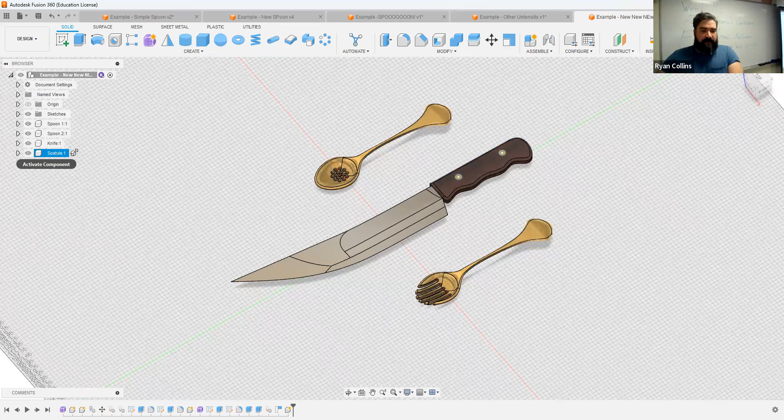So let me hop back over to Fusion. So we've got our sporks and spoons and giant kitchen sword. Let me start another one. I'll create a new component, and this one will be spatula. I'm going to activate that one, and let's go ahead and hide all the others so we're not confusing anything.

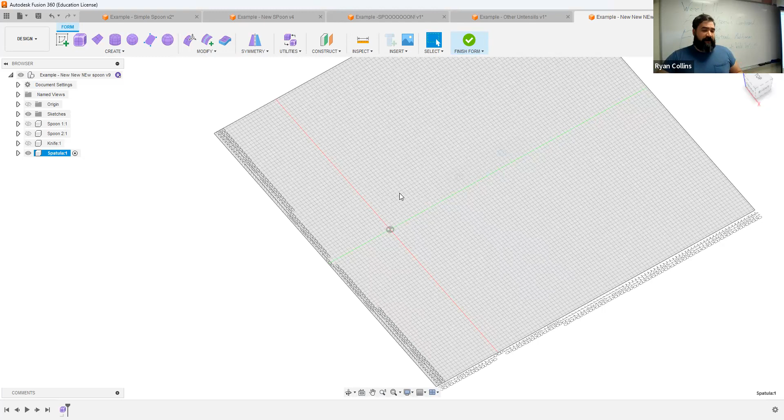So I'm going to start standard again, move into the create form workspace. There we are. Now I'm going to create the spatula by working with a plane and then manipulating probably a couple of planes. So in this case, start with a plane, same deal.

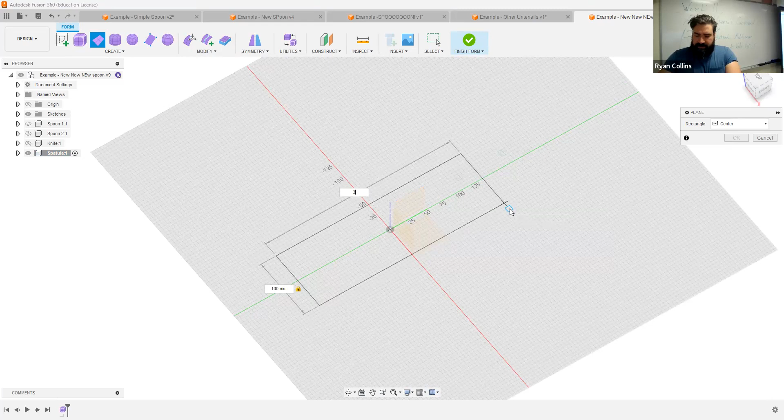There we go, I'm going to use it as a center rectangle. And whether or not we start with the handle or the blade doesn't matter. So let's go ahead and stretch that out. What should that be? Probably like maybe 100 millimeters wide. We can always stretch this more. And sure, let's say 300 long as kind of a longer handled thing.

There we go, hit enter. That locks it in place. That's a plane.

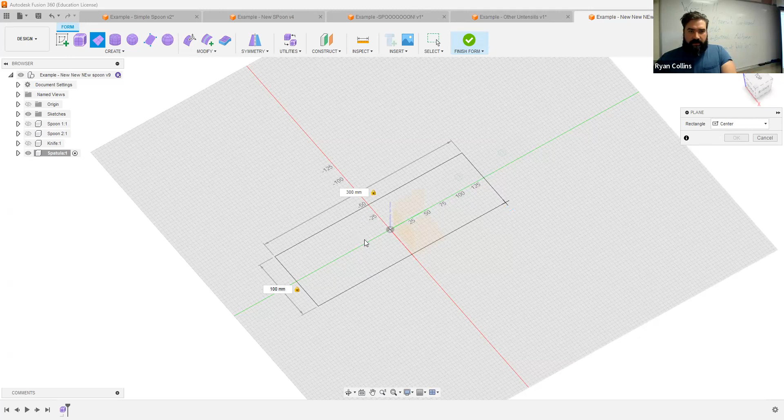Why is it? There we go, don't know what happened there. Clicked on it. Okay, so I made this wider like that. Maybe I shouldn't have, we'll see.

I'm still going to use just a pair of faces lengthwise, so I'm going to add symmetry along the length. There we go. But I think now maybe I should shrink this and then widen it after the fact. So let's add a couple of faces. Sure, again 4, that works, something pretty basic, hit OK.

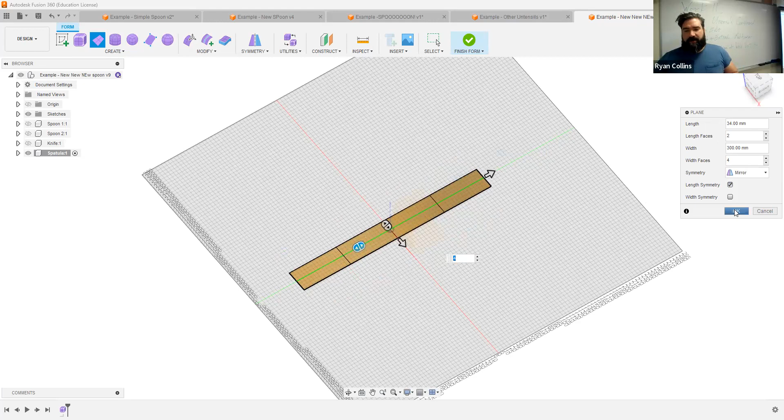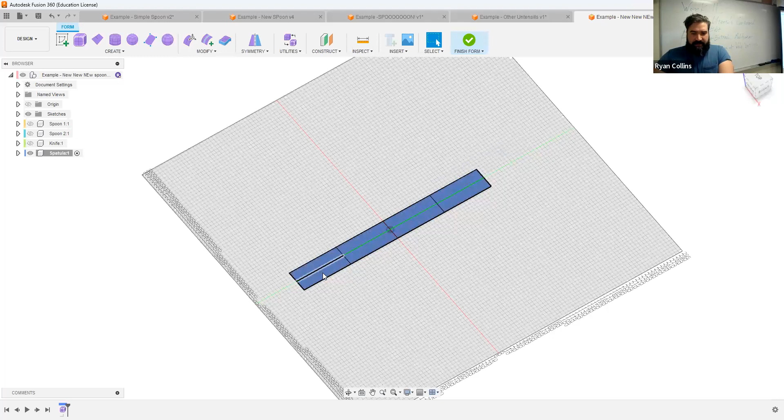Now what I want to do here, and I realize it's still colored, so let's switch to auto color, Shift N. There we go, different color, you can see the symmetry line a little bit more effectively. So what I'm going to do I think first is make this first segment the spatula, the scraper. So let's go ahead and edit form, standard stuff, movements, and all that.

I'm going to grab just this vertex and just drag this outward. Now you can see that's making much more of a sharp line, or sorry, a curved line rather.

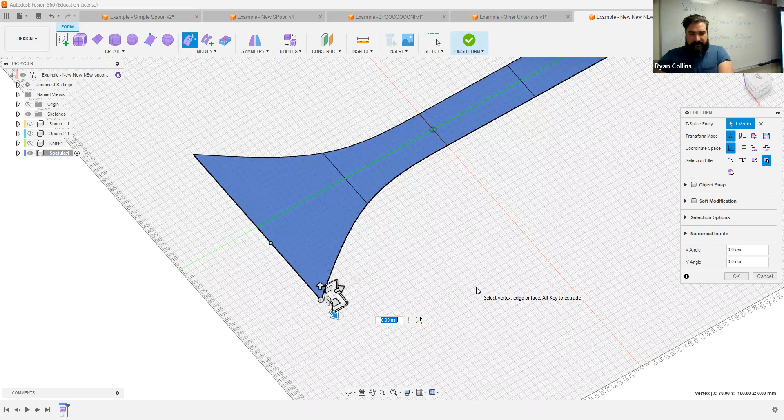That's okay. Or if I want to keep that a little bit straighter, what I could do instead, let's Control Z that. And instead of grabbing the vertex, let's grab this face, and I will rotate that face. Just a different way of working.

So see how now it's much more of a wider form there. Now I don't know how well that's going to work, that looks kind of a little wonky. Maybe now I should bring it back to straight, and there you go. Now that's still wide, or rather that's still curved. If you want that to be straight, that's okay too.

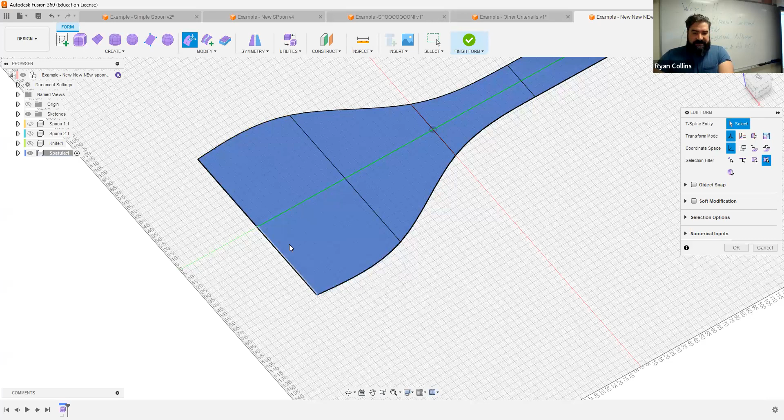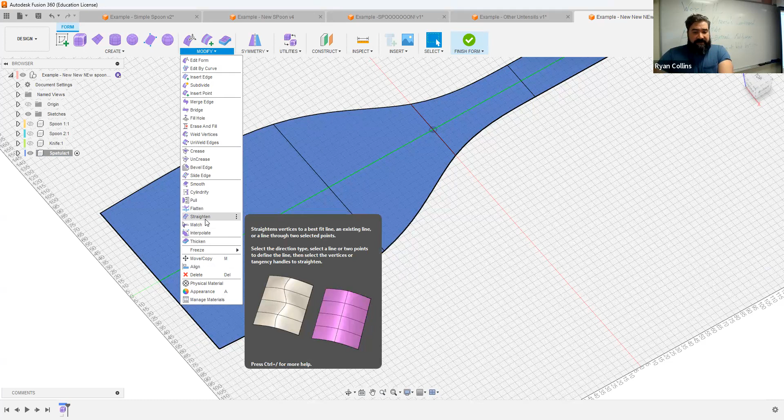Let's grab this side here. I'm just going to drag this down a little bit because I want that a little bit more of a longer workspace. So if you decide, you know what, I actually wanted that straight, what you could do is go to modify. Let me finish edit form, go to modify and straighten.

So this just straightens existing edges as best they can. So you can see where this is referencing a 90-degree corner. I want to straighten this T-spline. Now what it is, you have to select between 2 points, so I can't select this middle one, I want this one and this one.

And then control points, surface points, whatever. Let's see if it's going to work for me. Fit, select line, there we go. Let's see if it's letting me do it.

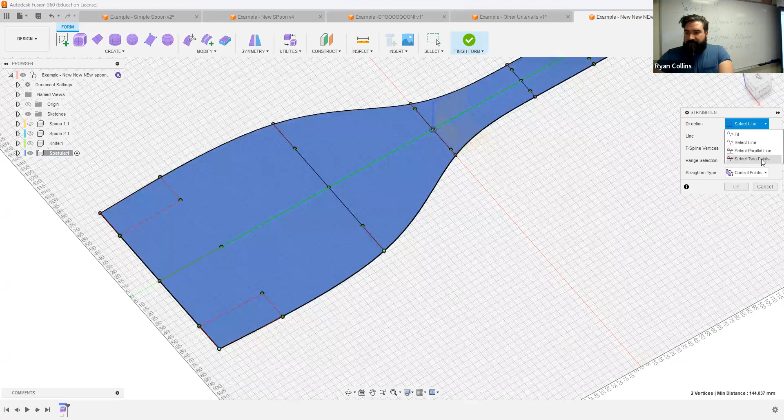Nope, fine, select 2 points. There we go, you see my reference line. It's hard to see, there's this yellow line that's appearing. It's a little bit difficult to see sometimes. Come on, let me. There we go.

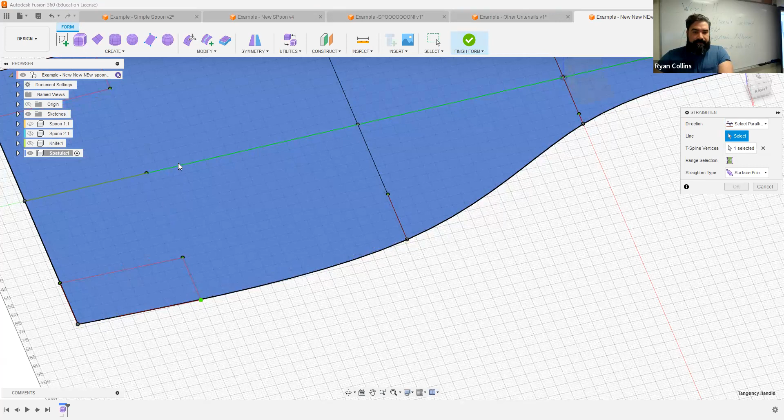So that part's straightened, but this is not. Come on. Sometimes these don't work as well as you would like it to. There we go, now I got my reference line. Let's drag this around, come on. Sure, let's select it along by a parallel line, if it'll let me do that. Come on.

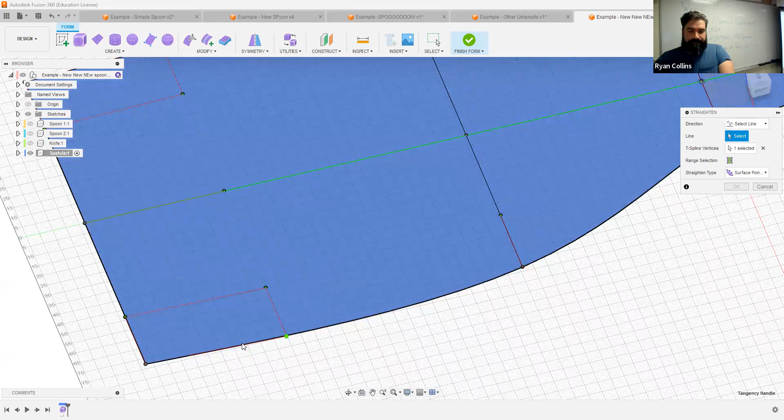Not letting me select my center lines here. All right, fine, abandon option. So it's not letting me work how I want to. That's okay, we can always trim this in a more straightforward way.

Now, what I do want is I want this to have much more of that up and down angle. So what I mean by that is I want this to not be flat. I do want this to curve upward.

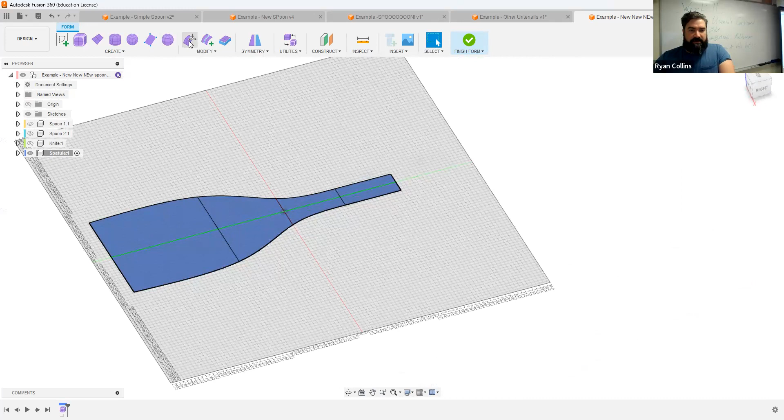So select, let's go back to edit form, and I want to select, let's just do it by vertice. You know what? No, I want to select by faces. This might be a little bit easier to work with.

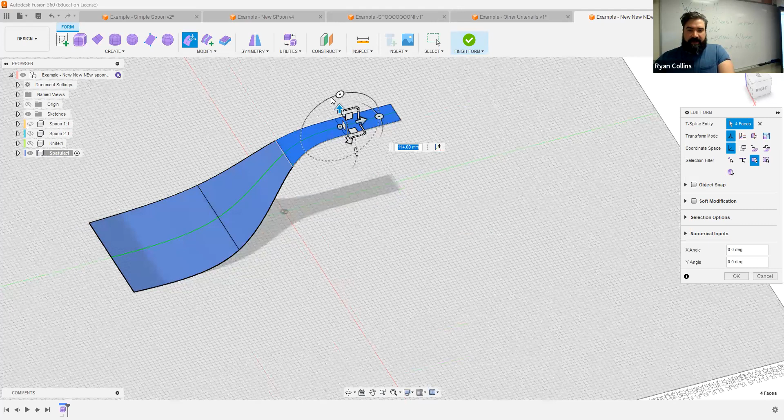So what I'm going to do is select all of those, and I'm going to drag that up, but I also want to rotate that. Oops, accidentally.

There we go, see how I'm getting my curvature here? But this part here is not quite cooperating how I want. So maybe what I want is my handle more like this, but I kind of want these angles, I don't want this to be quite of a sweep. I want this more to be straight.

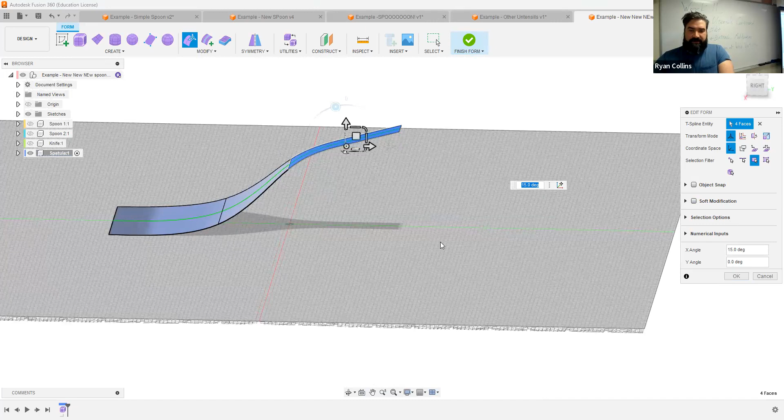Perfect. So I'll say, all right, I like where that is, hit OK. And then we'll go to modify and crease. All this does is sharpen those bends. I accidentally had that selected, so it automatically did that.

Great, okay, repeat crease. I'm going to select this line, and now I have much more of a sharp angle there. So you can very much think of this, not always a perfect analogy, but crease works exactly like it sounds. You're putting a crease in a piece of paper, a fold. It's a sharp line. Hit OK.

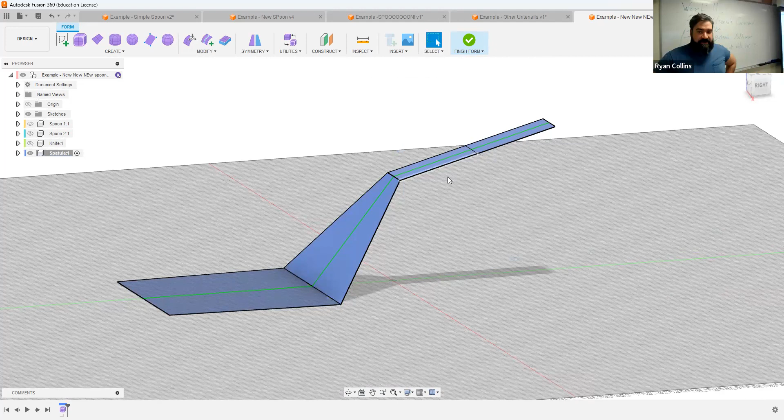All right, now that's pretty straightforward. Now, you don't have to have it like this - this bottom part, you want to leave that creased, and maybe up here you decide you actually wanted that smoother, you actually like that smooth transition. That's okay, there is an uncrease just below crease.

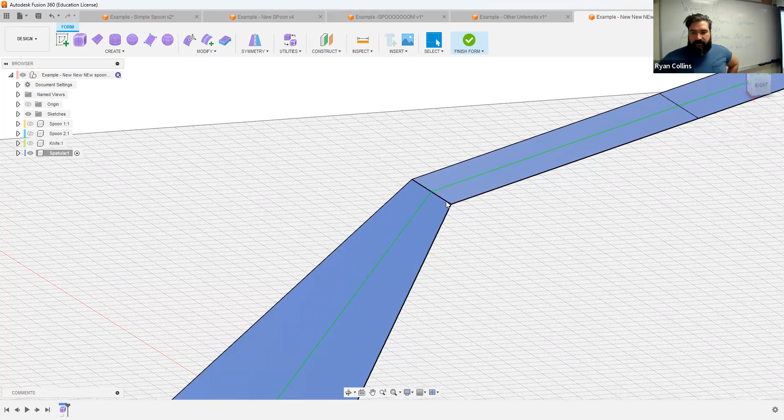Select your line between the vertices. Come on, why is it not working? There we go, for some reason it was edge of vertices. There we go, great, so now you've got your crease uncreased.

Cool, so that is going to create more of a rounded curve. It's harder to create this with just a more controlled edge, unless you create this with multiple pieces. So it's up to you.

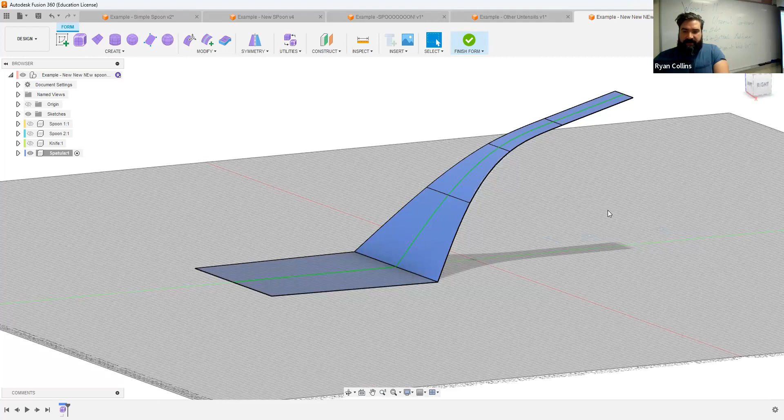You could smooth the more complex stuff. You have beveled edges, you've got a variety of different options. Let's try that, select both of those. You could play around with this. Sure, there we go, one segment. Hit OK. Really, in this case all I did was add an extra line in. So whatever, those are just more things you can play with.

But really what I wanted to show you is just how you can make some creases, make some manipulations there. See, now that I made that hard crease, this line sharpened up too, so it kind of defaults in.

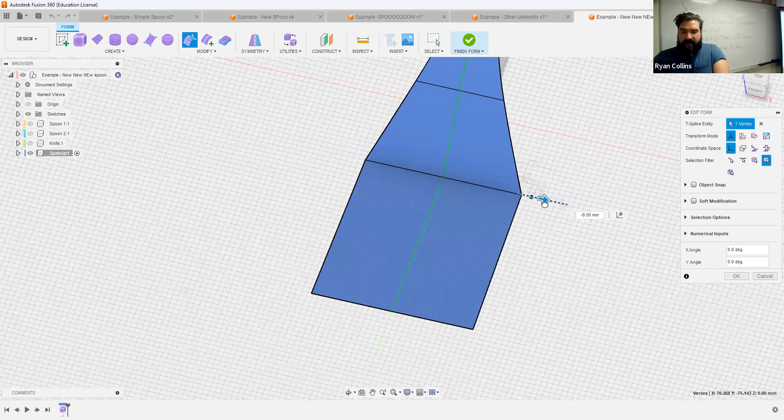If you still want, I can go back to edit form, select just that vertex, and drag that in a little bit. See, now we got it straightened out, or if you want a little bit of a flat spot, whatever. It's up to you. Hit OK.

Now, the trick here is, let's say it might be easier if I do go ahead and crease this. So let's add the crease back, but now in that line. All right, hit OK.

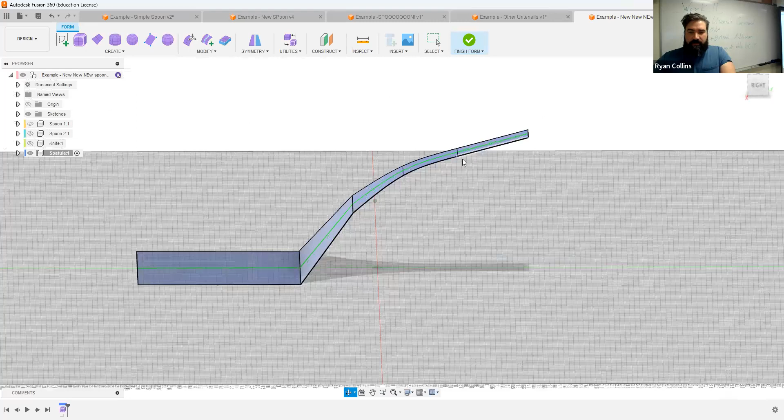And I want to make a handle, rather handle like I had made for the knife - excuse me, I was going to say knives, knife. That means this whole handle section kind of needs to be flat. So we've got those, and you literally can flatten a space.

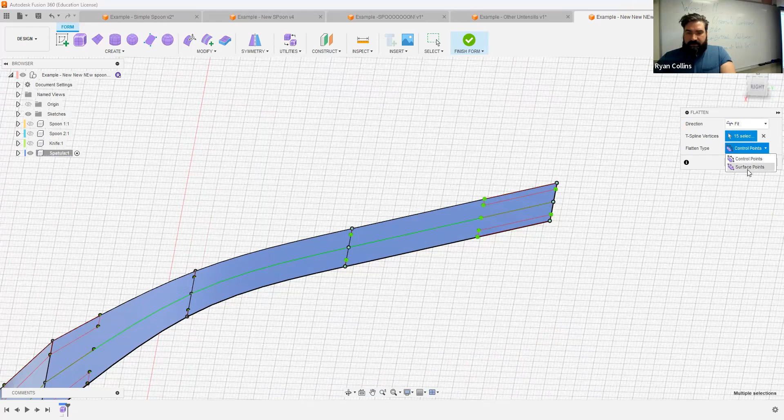So direction to fit, T-Spline. Well, let's just select all of those. There we go, by control points or surface. Yeah, I'll leave it as control points.

There we go, or do we need to select more? Let's go ahead and select some more. There we go, hit OK. It was already pretty flat, I guess. Let's try that again.

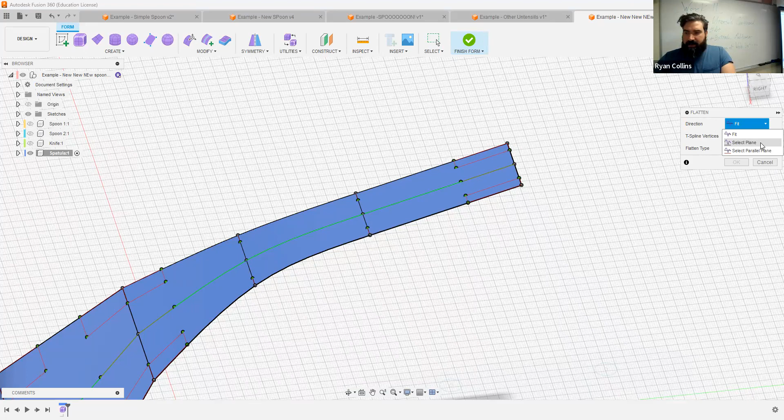Oh, let's see, by plane? Sure, let's reference it instead by plane. Select the base plane, select the T-splines, let's select all of those. Not quite the flatten that I wanted. I kind of wanted it to stay where it was, just angled a little bit better.

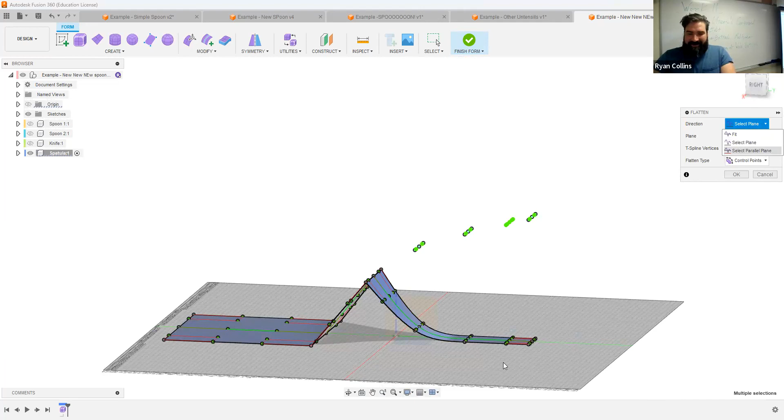All right, so that didn't work nearly as well as I wanted it to. There we go, select parallel plane. So selected that parallel plane, those points now flatten back out. There we are, we're good. Okay, so that was just flatten in that direction.

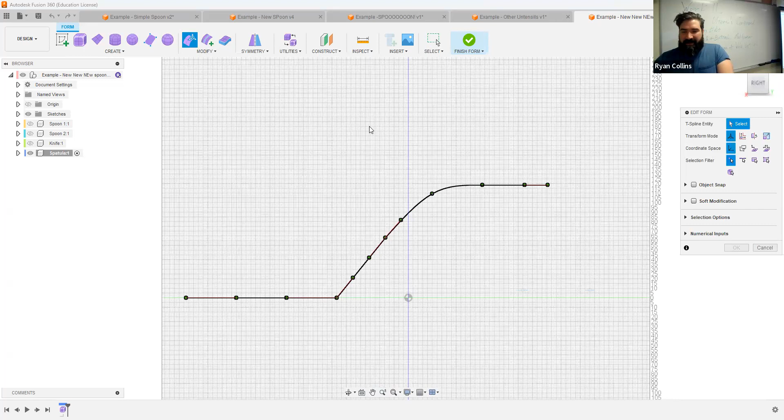All right, that's not what I meant to do. Now, granted, this is a pretty extremely large spatula going here, so let's shrink this a bit. And let's just go by vertices again, and let's just drop this down a little bit. All I'm going to do is just literally bring it down a bit, because this is getting pretty complex.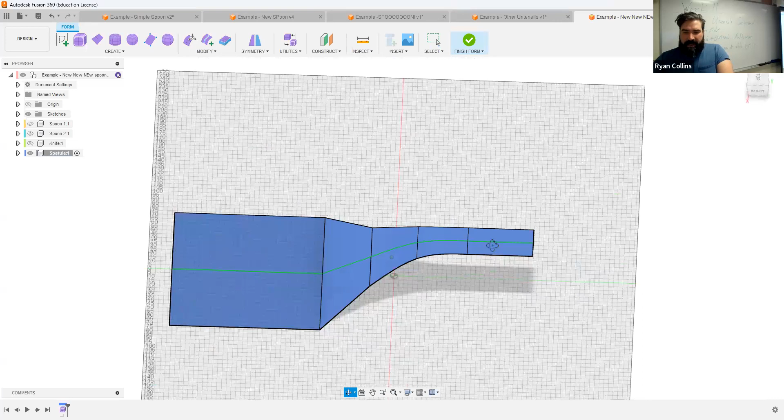There we go, that seems slightly more reasonable. If you decide this handle's too short, remember we can go to edit form, and we could even drag by edges, double click. Let's drag it out. There you go. So something like this, you can finish and make some extrusions, that sort of stuff.

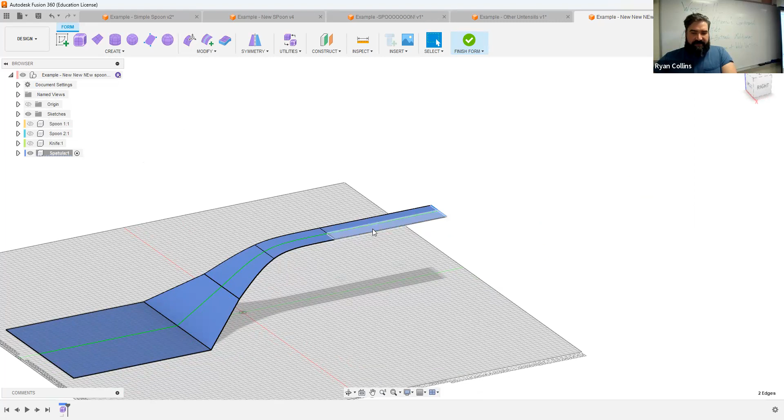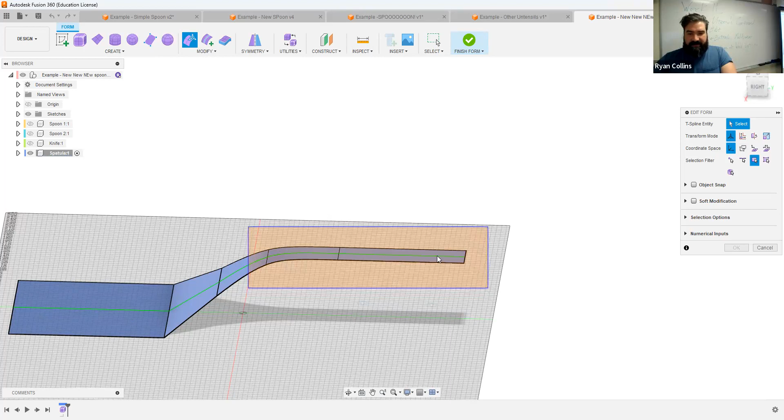But I did want to highlight what happens if you wanted this to not be flat, or parallel to the plane. What if you wanted this at an angle? Let me go back to edit form, select by faces, and just as reference, let's angle this up a little bit. See how it's much more at an angle, but it is flattened. So that's fine.

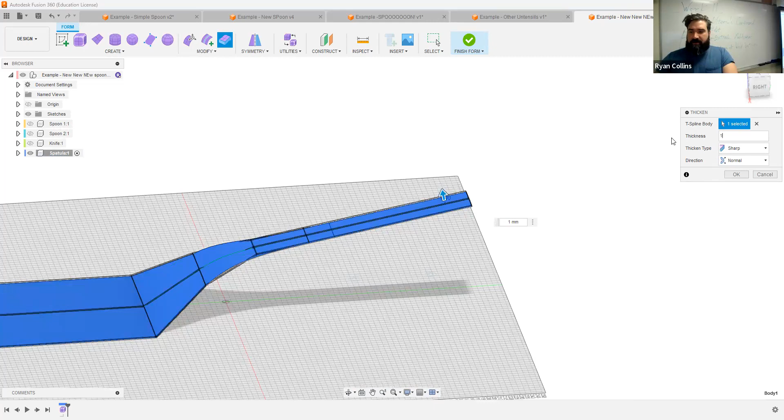And we can call this good. If you want, obviously you can round stuff out. But the last thing we want to do is add a little bit of thickness to this. So let's thicken, we'll leave this at sharp. Now this is going to be thin, so let's say 1 millimeter thick. Hit OK, there you go. Pretty thin, spatula is nice and flexible, all that kind of fun. Let's finish form.

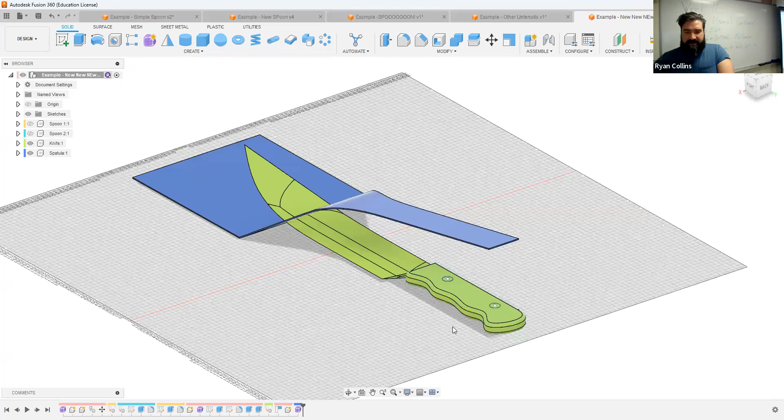No errors, great. Now the thing is, I want to create a handle like this knife, or similar to this knife - just sketch and extrude and all that, and probably put some pins in it too. But I want this shape to be at an angle. Really easy to do.

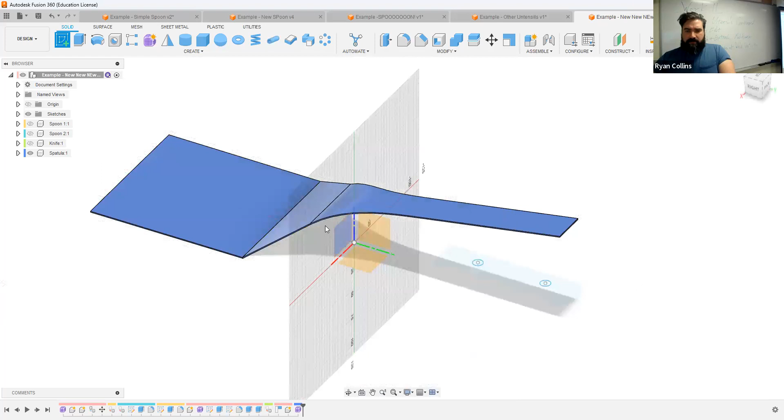All you're going to be doing is exactly what you just did, only we need to create a construction plane. Now you can try sketching directly on this face. Sorry, something's not letting me. What's going on here? There we go. That's weird, not letting me select anything. Anyway, that was why I was going to say construction at an angle, or we could offset something. You can try to select, if it lets you select the face, great. Now I'm actually able to select that, but you're not going to be able to get a construction plane directly off of that. And because this is a curved surface, it's not going to let me select a sketch directly on that.

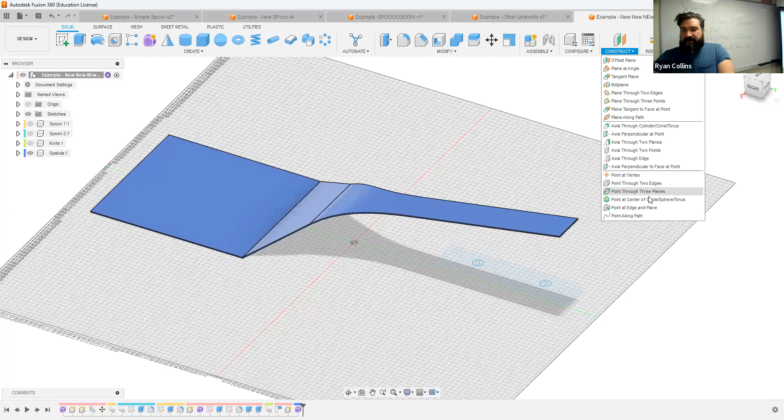So what we could do, excuse me, we did the plane through points, stuff like that. That's fine, but we're going to try to do this through edges, selecting two edges. See how it's letting me actually select stuff? Now the problem is we have this edge at this curve, and there's not a face in between here. So what I might have to do is go back and try to create an edge there. But let's see, we select that line - won't let me do it on that one. So we try to select the two edges here. There we go, so now I can actually sketch on a construction plane.

Ah crud, I accidentally had the - why is it a point? Sorry, give me a second. Oh, I accidentally created a point, not a plane. Jeez, my mistake, I accidentally selected a point. That's all right, I was supposed to have been working on Spatula anyway. I deselected it to show everything. All right, back to construction, blah blah blah blah blah.

Sorry, my phone was ringing.

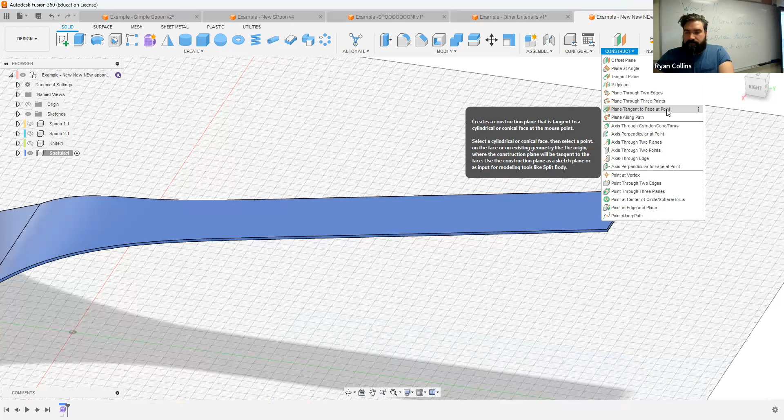There, sorry, through two edges. Sorry, I got distracted on stuff. So we have some edges. There we go, it's not letting me select that. All right, well I told you it was easy, and now it's not letting me because I had this additional curve in that. That's all right. So the other option would be, if you're having trouble with this, like I clearly am, because we created this extra curve, that just means we need to try to make something at an angle.

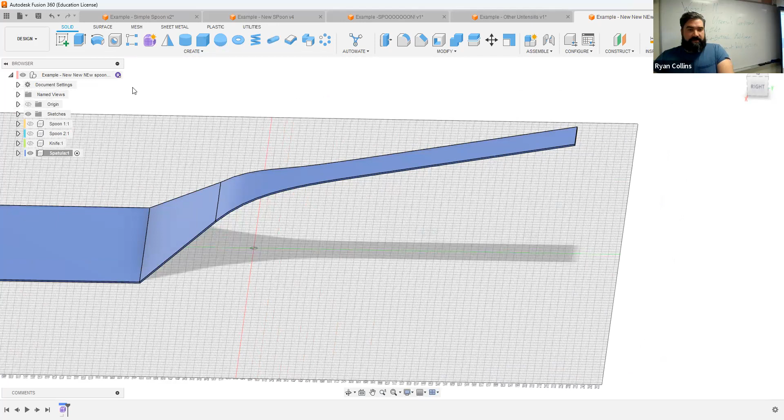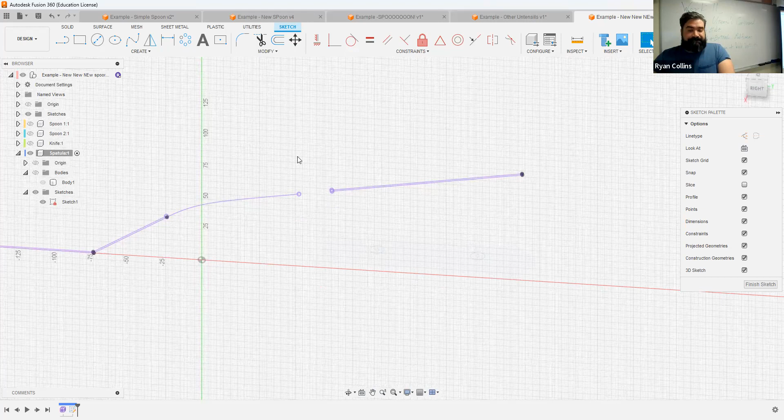Easy way to match that angle is we try to create a sketch on the side and just use a project tool to copy that whole body. There you go, all right, open this stuff up. Just expanding all our stuff here. So we have this - I don't know why it didn't duplicate that. That's odd. Anyhow, now I have a line that I can copy.

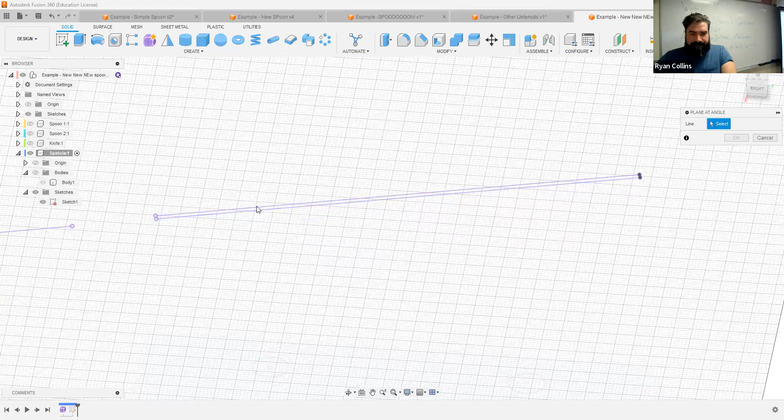That's all, so construction plane at angle. I just need to select that line. Why is it not - it's letting me select that one, but not the other. All right, whatever. And since it's not letting me, or since it's defaulting straight up and down, that's not a problem, we just rotate it 90 degrees. So there we go, now it's letting me create a construction plane at that face. See?

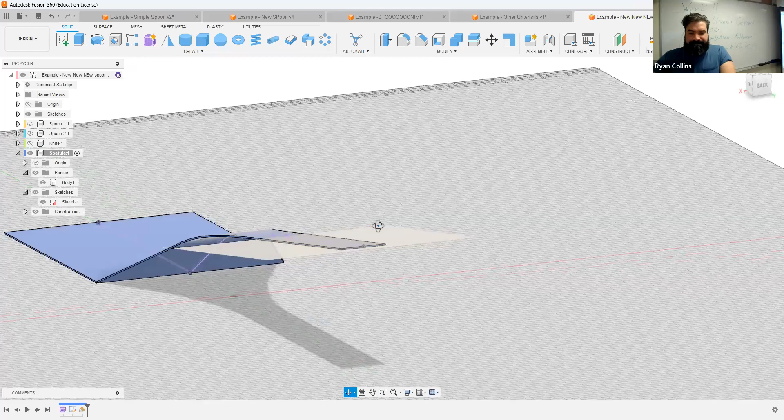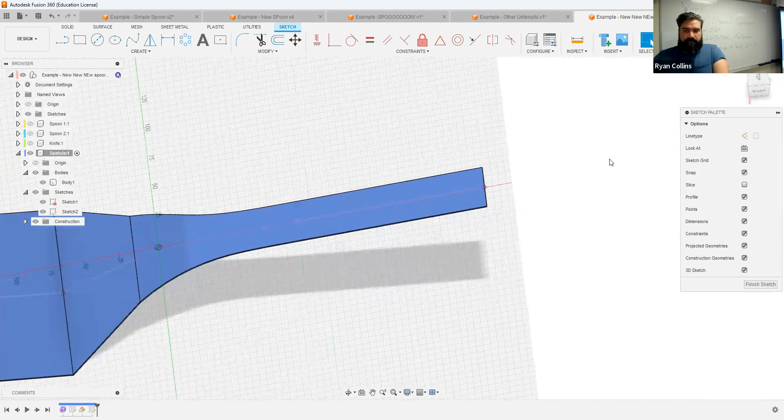A little more complex than I was hoping it would be, but that's because we had a slightly more complex shape. All right, and from here it's just the standard - create a sketch on that plane, it flattens out. Jeez, that is confusing. There we are, and we do exactly the same.

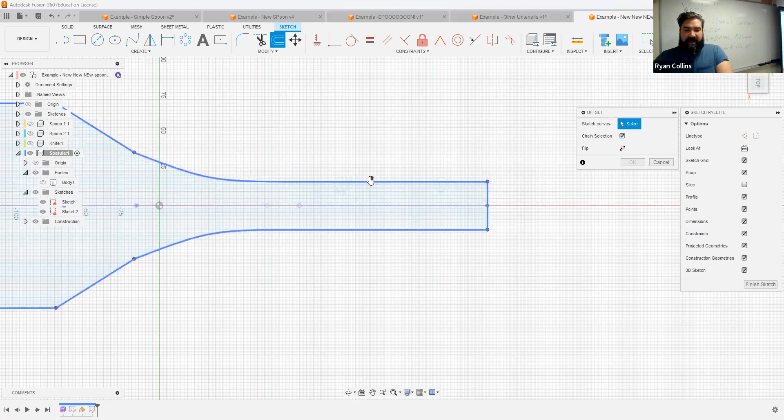If you want, you could duplicate this shape here, we can project that spatula. Again, there we are - hide the body just so we can have a little bit more control over this. And now just create something around that. So if you want, let's try offsetting that line, just out a little bit. Sure, what is that? We'll say negative.

Oh, I don't know, 2 millimeters wider. Not 0.2, 2 millimeters wider. Great, okay. And then we'll just pick a spot somewhere on here.

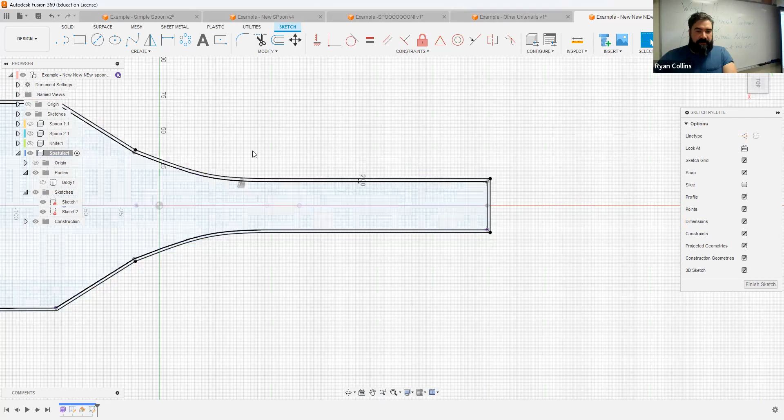So unhide the body, see where I was working. All right, the curve starts about there. So let's make the handle stop somewhere around there. Kind of sort of pick a spot, draw it out, make sure it's 90 degrees.

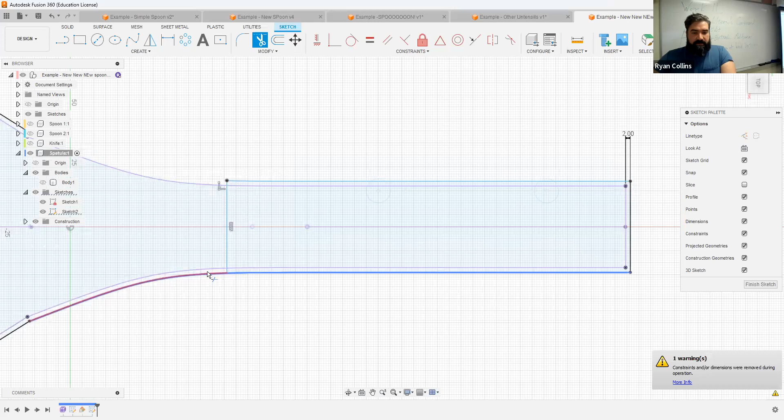Great, just hiding that again so I can see what I'm doing. That's all, trim off these extra bits. That's fine, don't need that. Because all I'm doing is just going to round this out a little bit with the quick fillet.

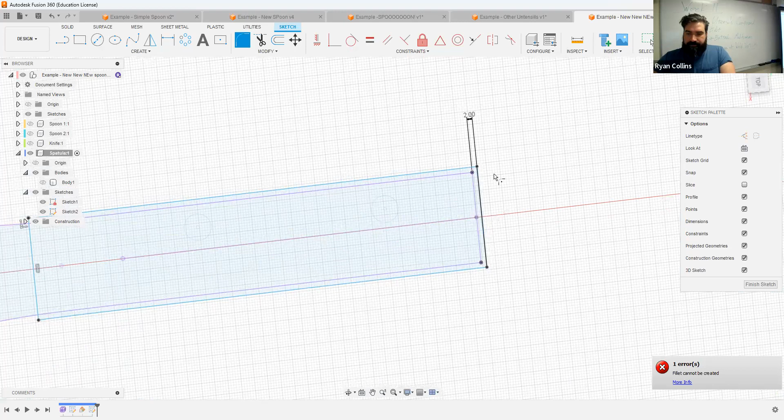Fillet cannot be created, why? Part of it's a projection? What is your problem? All right, fine. For some reason it's not letting me create the fillet. Okay, we'll just extrude that and then,

excuse me, we'll just extrude that and then round it out afterwards. Okay, so we have our sketch all finished. Hit extrude.

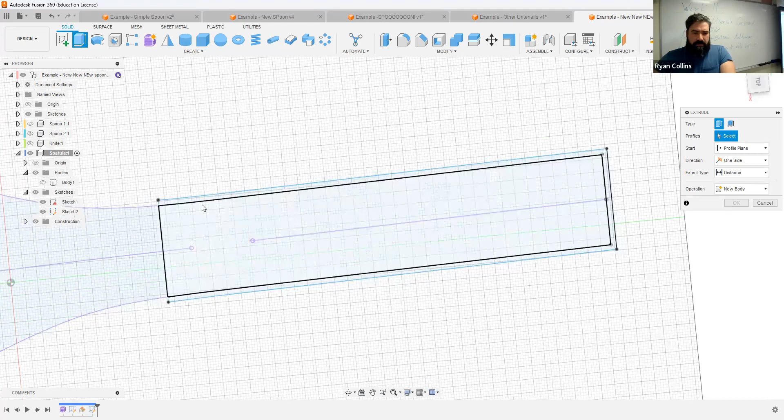Oh, that's odd, there we go. And just make sure that you're still extruding along that line. Let's go symmetric, I don't know.

10 millimeters seems like a reasonable size for a handle. Probably a little excessive, but whatever. Oh, whole length, 10 millimeters. There we are, all right.

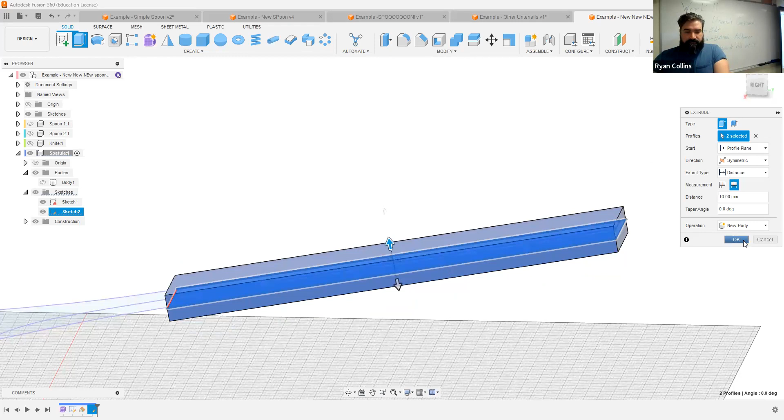And we'll just fillet those edges, or actually let's do the corners. Just selecting all around, and I don't know, 2. And let's make it a little bit more. 5, there we go, sort of kind of rounded.

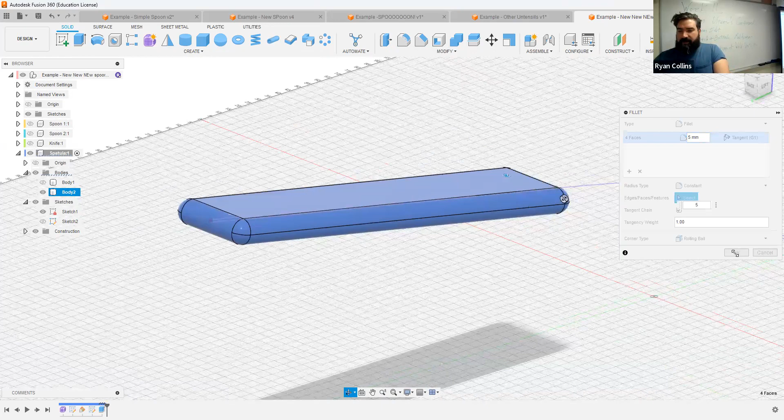There we are, unhide the spatula body. There you go. Now, granted, that's not ideal. There's kind of ran into a couple little hitches, but that's all right.

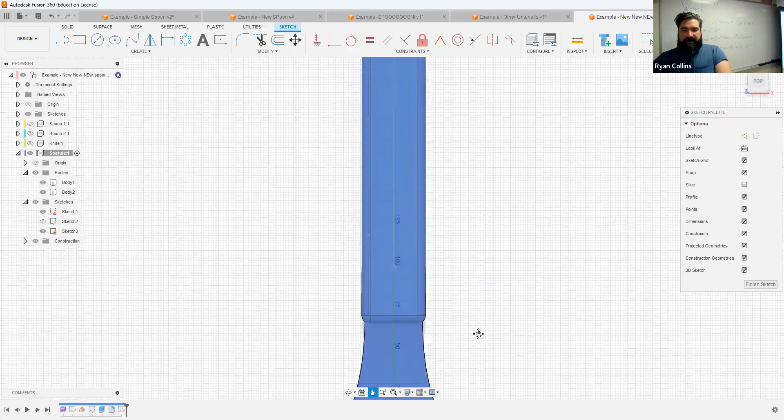Last thing I could do is, again, just make a couple of shapes on there. So, create sketch on that face. Now that I have an actual flat face to work from, it's going to orbit around. That's okay, I'll do the same thing that I did before.

Let's make a couple of pins on that line. 10 millimeters, great. Make a copy and paste. Drag that down somewhere, just because I feel like making it even. There we are, okay, finish sketch.

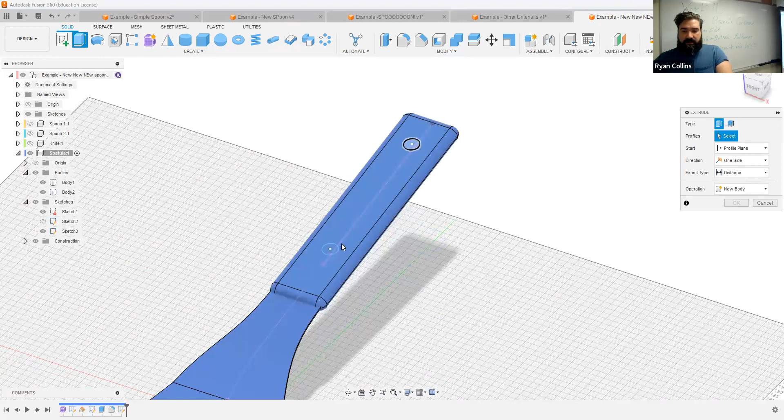And now we extrude those two. Now this time, to make it easier on myself, I'm still going to go to object, select underneath. There we go. Only instead of cut, first I'm going to create a new body. Hit OK. Now I'm going to repeat that exact same thing, or not extrude, sorry.

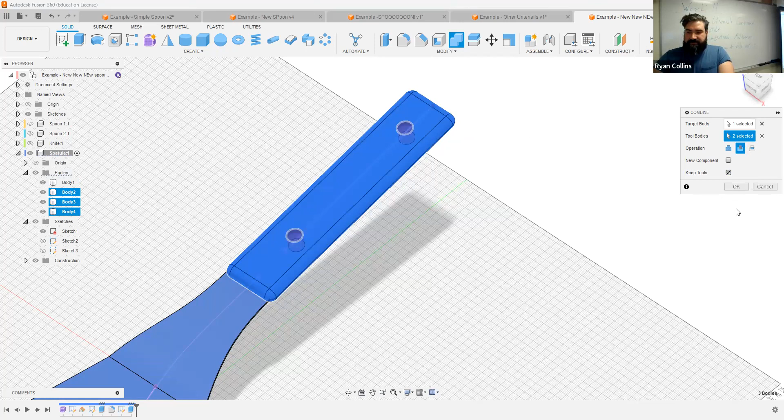Use the, what's going on here? There we go, combine tool. Target body is right there. And tool bodies are those pin shapes. And I'm going to cut, but I want to make sure to keep my tools. There we go, so now I have

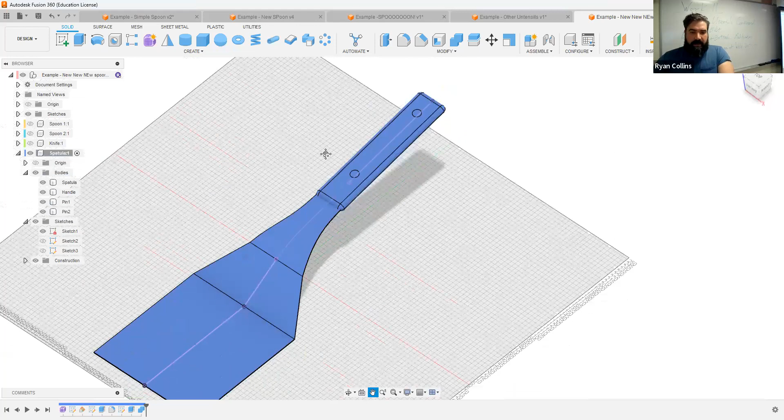spatula, handle, and pin 1, and pin 2. There we go, so look, got a little bit awkward right there. That's not quite what I was hoping for, but we managed to make it work.

Excuse me, and shift back to color mode. Ooh, golden spatula, and we'll make a nice, what's going on? Why is it? Something's going on and it's automatically coloring everything. So let's make sure to save.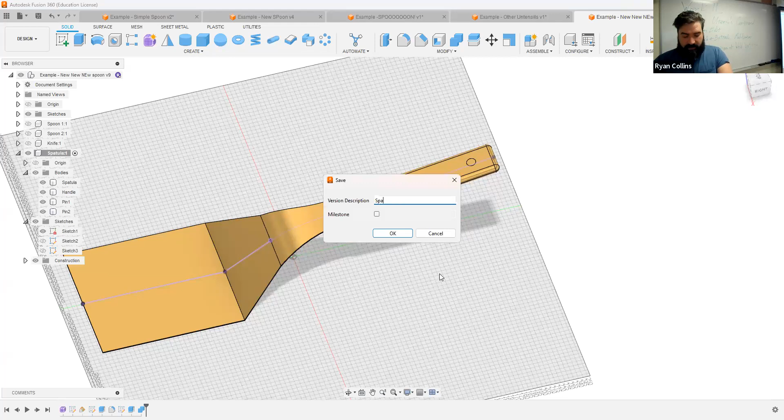So if you run into something like this, if you're trying to apply an appearance and it's not cooperating, often enough, might just be because you need to save and exit. Sometimes that happens, not sure what's going on with it. But there we are, so yeah.

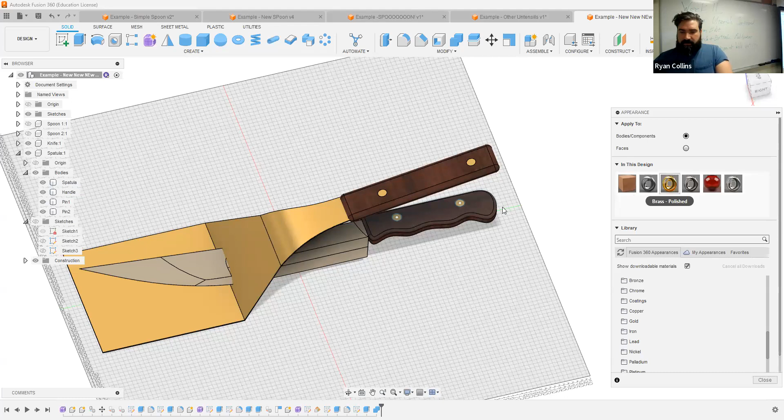Oh, okay, there, that time it worked. Strange. Really weird that it's not letting me apply that. Oh, okay, that time it did. Okay, I got nothing, I don't know why it's doing that.

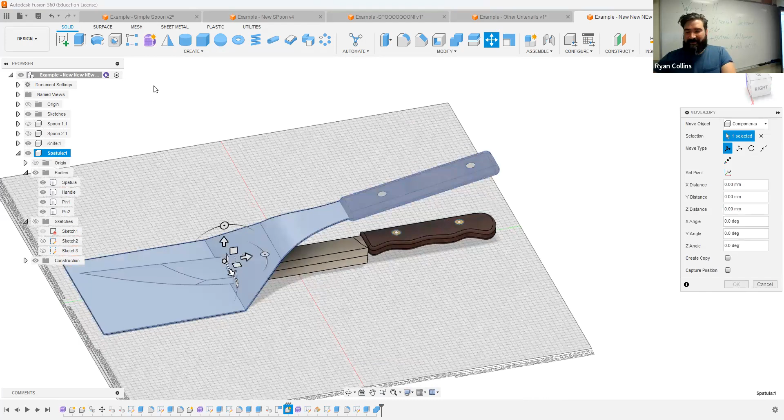All right, and I'll just move that out of the way, just dragging that out of the way so it's over somewhere. Fine, all right, so a couple of complex issues I didn't really want to have to, I was hoping not to have to deal with, but because I had this curve instead of it flat, it just caused a slightly complex shape.

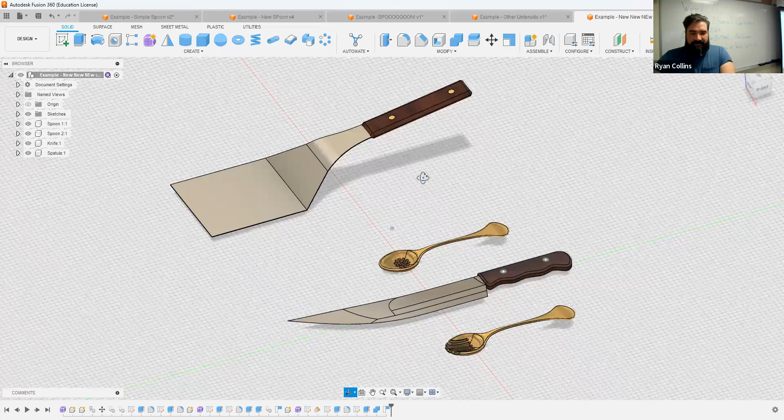That's all, capture the new position, but there we go. So again, simple tools, I'm not looking for anything overly complex. I ran into an issue, had to work around it. That's okay.

Just some more variety of options you could play with. Ultimately, we are looking for a complete shape, meaning like, all right, the spoon or that kind of utensil, fork, butter knife, that sort, it's all kind of one and the same. Or you can combine and add features and other bodies to create like a handle, that sort. But this is pretty basic stuff, I'm not looking for anything complex.

But there we go, I just wanted to show you a little bit more, something else you can play with if you want to, totally up to you. So ultimately with this stuff, play around. You're going to run into some issues, and hopefully you're able to find a way out, or try something else. All right, good luck with it.